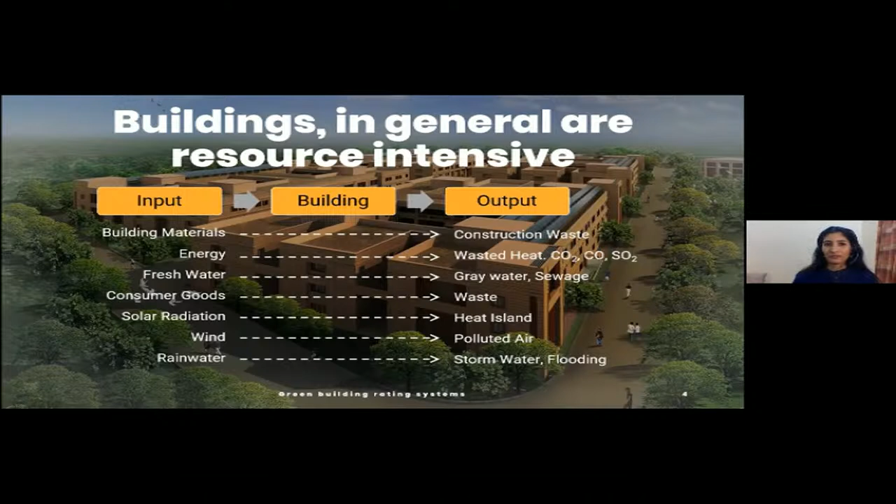I want to start with talking about buildings overall, right? This is all about buildings that we're going to talk about. In general, buildings are resource intensive, whether they are good buildings, bad buildings, great buildings, or whatever kind of building. There is lots of material that goes into building them. It takes energy to build buildings, it takes water during construction, and so on. And during the operational lifetime, there's a lot of output in terms of waste, solid waste and wastewater, air pollution, and so on. So this is the nature of construction and buildings in general.

Now, what green buildings aim to do is reduce the negative impact. So the impact is there—can we reduce the negative impact? That is the aim of green buildings. And yes, it's possible to do that.

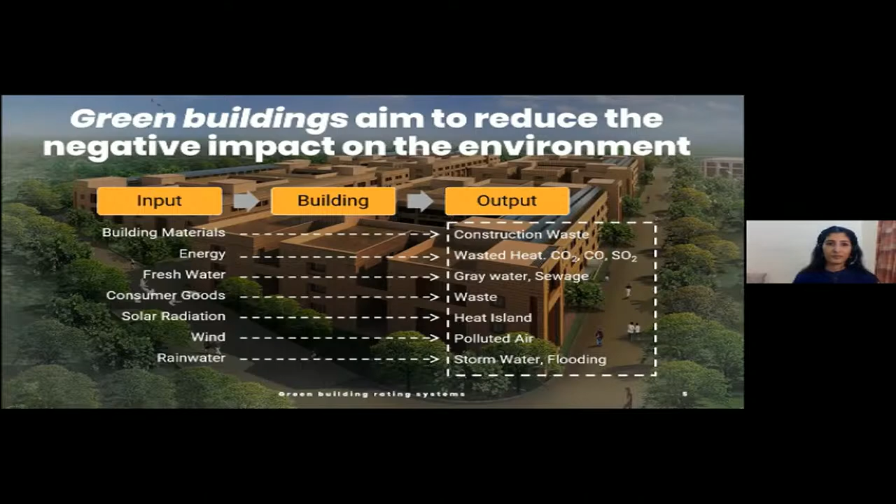Now, the concept of green buildings is not new, I'm sure you all know that. If we look at vernacular examples or old settlements from history, we know that we always knew how to build buildings that keep people safe and also comfortable, in terms of the indoor environment—whether it's temperature, humidity, and so on. Whether it's India or across the world, we see so many examples, which is a testament to the fact that we always knew how to design buildings, and by default, these buildings were green.

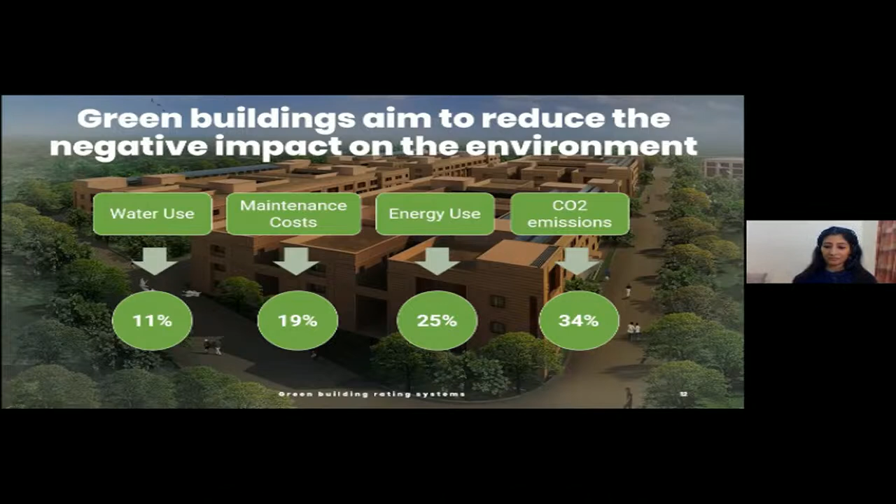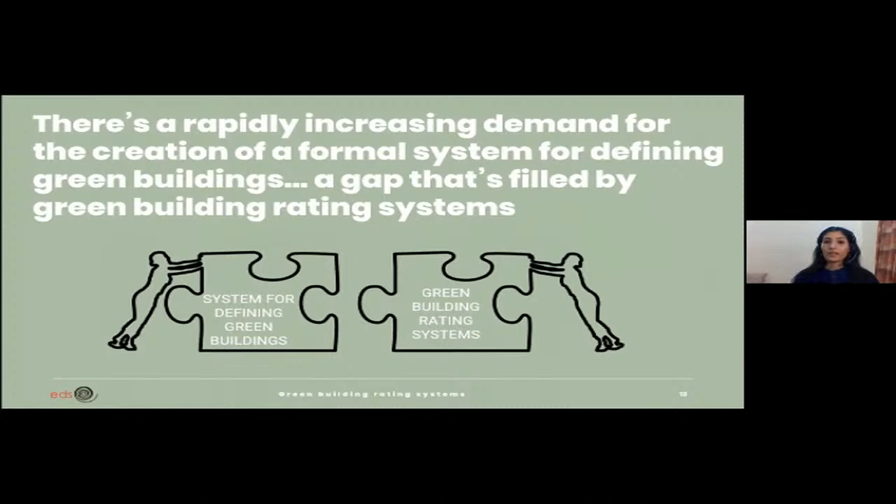But that's not true. And because it's not true, there's a lot of confusion around what is a green building. How does a green building really look? Can we define green buildings? What are the metrics that make a building green? So there is a rapidly increasing demand to create a formal system for defining green buildings. Is it a building that only uses stone and mud? Is it a building that has to look a certain way? Is it a building that has to have certain things in place? What is it?

That's what rating systems help achieve—a system or guideline to verify that a building is green. It's a set of criteria given to a builder, designer, or owner, which when followed helps verify that their building is green. It gives a definition of a common baseline of what is considered green. So if you compare different buildings across the same rating system, you can compare across the same baseline. There's some kind of commonality which green building rating systems provide.

Further, it's also an assessment tool because it's a rating—you're measuring against a certain baseline. As we move on, we'll understand the criteria in which green features are assessed. And finally, to recognize environmental stewardship. This is also very important, where clients or owners are recognized for their efforts to showcase environmental stewardship. It talks about their commitment to the environment, and their efforts are recognized, which is a very motivating aspect in taking that extra step towards making sure the building is really green.

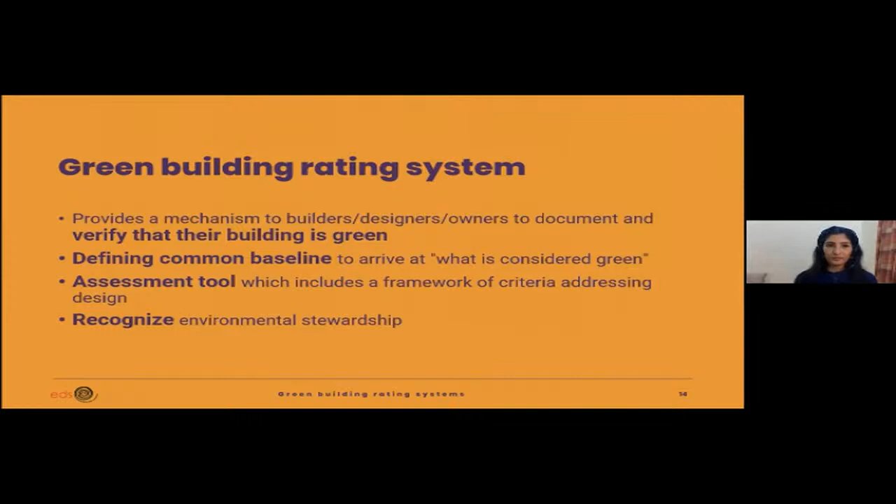Now, the goal of all rating systems is ultimately market transformation. This is really important—the majority of buildings are probably following typical building practices, and you can't call them sustainable or green. Whereas rating systems are pushing the market, so you move from business-as-usual typical practice to a green building market where there is demand for green building attributes. That's what rating systems have successfully managed to do over the years and are continuing to do.

An example is life safety. 100 years back, buildings probably didn't have life safety codes in place. But today, it's unthinkable to have a building which does not have fire suppression systems, for example—it's a given. Just like that, many green attributes become business as usual and a given. Over time, this market shift happens, and rating systems make sure this shift happens rapidly—they increase the pace of this shift.

By doing that, rating systems have helped make several industry best practices become mainstream. A good example of this is using materials with recycled content. A decade back, it was a bit of an effort to find such materials with recycled content and also have the supporting documentation. Today we've moved beyond it, and we're talking about embodied energy, EPDs and LCAs for materials. So it's probably mainstream now to use wood which has recycled content, for example. No one is really going to ask you about that anymore. So it's become mainstream.

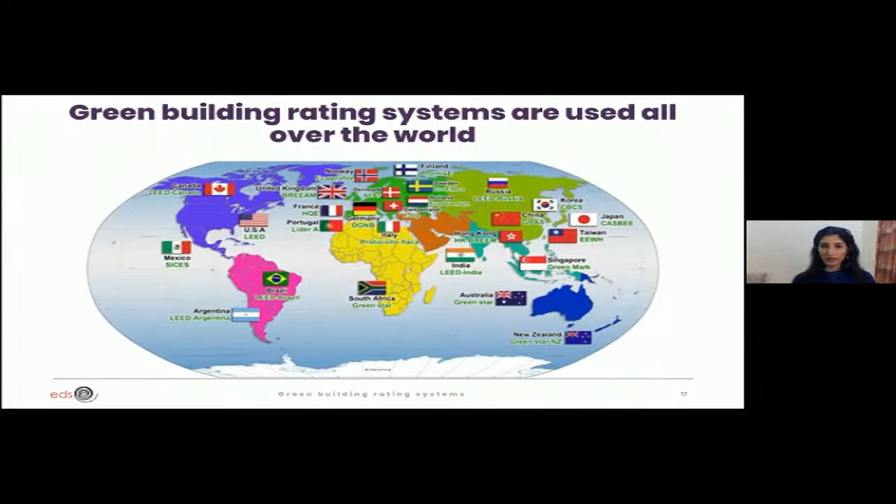Now let's talk a little bit about the movement in India, the green building movement. It started with the establishment of the Indian Green Building Council in 2001. Now we are in 2021, so it's been two decades since IGBC was established, and this marked the green building movement in India.

At that time, this flagship building was built - this is the CII Godrej Green Business Center in Hyderabad, India. This aerial view is the latest picture, so they've gone through a lot of retrofits. It's a 20-year-old building now; technologies have changed, and now this is a net zero building. At that time, this building was the greenest, platinum rated building in India, and it flagged off the green building movement, I can say. So if you wanted to look at a model contemporary green building at the time, this was the answer. It had all the green building best practices possible integrated into this project, so in that sense it's very iconic. That was the start of the green building movement.

Now at that time, USGBC and IGBC had a partnership, and so the rating systems were called LEED India New Construction and so on. Further, in 2014, IGBC became independent. And in 2007, shortly after IGBC was established, we also had the launch of the Griha rating system by TERI, that is the Energy and Resources Institute. So you had IGBC, which is the governing body for the IGBC suite of rating systems, and then it was LEED India. And Griha was this indigenous, made-in-India rating system, I can say.

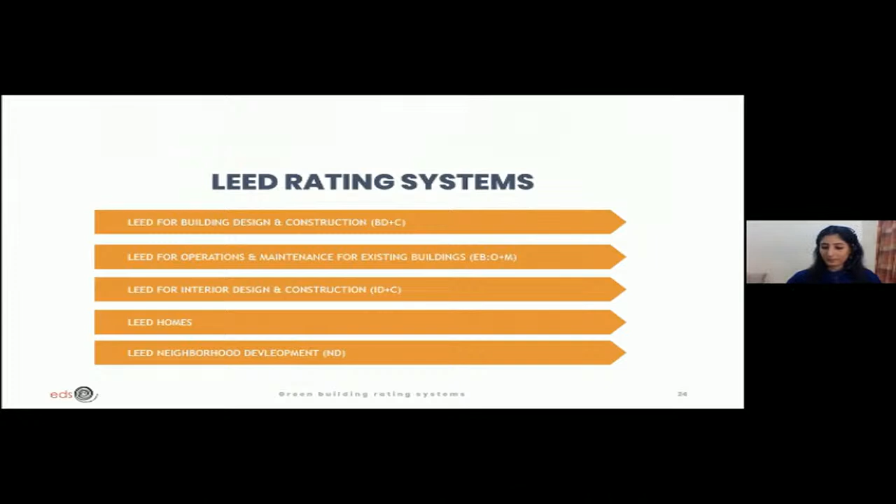Griha doesn't have such an exhaustive list, but depending on the size of the project, you have different rating systems. Griha itself is for all new buildings greater than 2,500 square meters. For smaller buildings, they have SVAGRIHA, and for large master plans, they have Griha LD, or large development, and then housing, and so on.

Since it's a rating system, there are certification levels. For LEED and IGBC, you have certified, silver, gold, and platinum - these are the four levels. For Griha, you have star rating. All three of these ratings are point-based systems. Over a score of 100, depending on the number of points you score, you can get either certified, gold, or platinum levels, and similarly for star rating, depending on the number of points scored for the project.

You also have professionals, green building professionals, like LEED professionals who help in... these professionals help projects achieve certification. They guide a project team in how to go about meeting the requirement in the specific rating system.

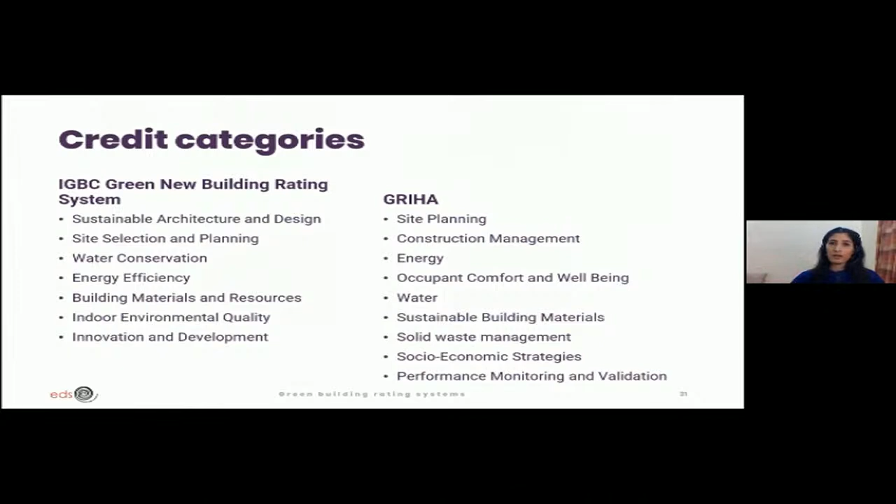On the other hand, GRIHA also looks at site planning, energy and water and materials, and indoor environment quality in terms of occupant comfort and well-being. So at a high level, they all address the same aspects of building design, construction, and occupancy. In LEED, it's called core concepts, and again, LEED addresses location, site, water, energy, material, and indoor environment quality.

So in a nutshell, rating systems address design, construction, and operations and maintenance of a building - it's the whole cycle. But there is a lot of emphasis on design, especially for a new building rating. Whether it's a new building of any kind, a home, an interior design and construction, or an entire new building, design has a big focus. This sets the direction for the rest of the 30, 40, 50 years of occupancy of the building, and it is the root cause of a lot of environmental issues.

A bad design will remain a bad design all its life, and no matter how much good technology you have in the building, it's only an add-on. Good technology is like a band-aid to a bad design. So you have to get the design really, really correct.

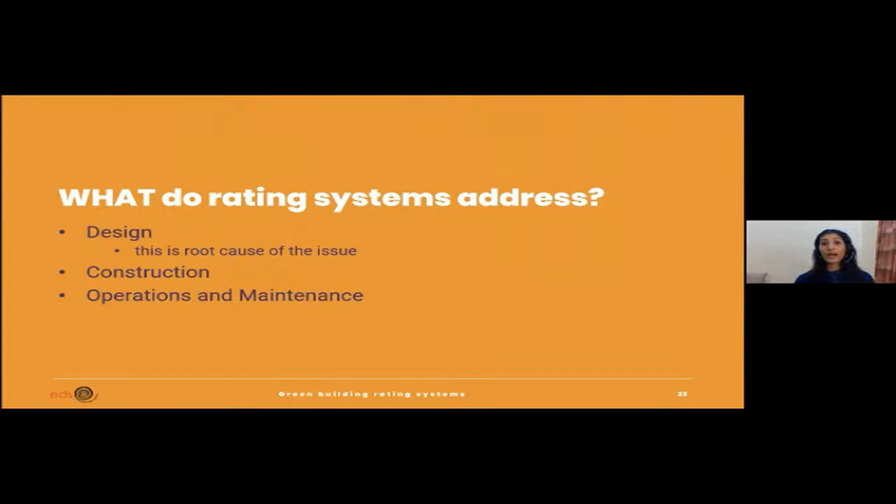A lot of emphasis of rating systems is on getting the design right, right from site selection to site planning, landscape, how the building is designed, the materials are selected, the way daylight is in the building, thermal comfort, and so on. Of course, there is some emphasis on the construction aspect, and then what happens to the building after it is occupied.

The measurement of the green, or the degree of green of a building, is both qualitative and quantitative. Not everything can be measured. You can measure water savings and energy savings, but something like daylight is more qualitative, although you can measure absolute daylight levels. Glare control is a more qualitative aspect, as an example. So rating systems do address both, with criteria that measure qualitative and quantitative metrics.

In a nutshell, green buildings provide long-term social, environmental, and financial benefits. That is the triple bottom line of sustainability. Green buildings, or anything to be sustainable, must address the three pillars: people, planet, and profit, or human health, economy, and the environment. As long as it addresses the three pillars of sustainability, it will have a positive impact on the environment and be truly sustainable.

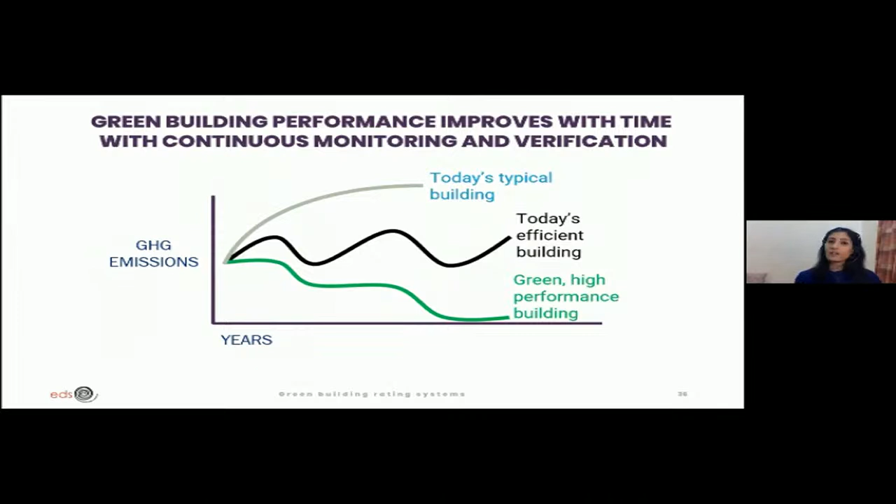Having said that, there are some limitations of rating systems as well. Starting with, it could be expensive. You may want to remember that all rating systems are voluntary, not mandatory. Projects that aspire to be certified have some aspiration, or maybe a requirement in place. So it's a voluntary decision taken by the project team, and there is an expense to it. You have to pay the registration and certification fee, so it comes at a cost. Sometimes it could be expensive, and there could be budgetary constraints.

It could also happen that a project team is only driven by scoring points, and the motivation to truly make the building green may or may not be there. Depending on which rating system it is, there can be a lack of regular and consistent updates. Sometimes it's so technical that you need specialized skills, calling for certain professionals on the team, which means an additional consultant on board, and the rating system calls for more additional paperwork. It is also perceived as complex and technical, which could be a deterrent to adopting or looking into a rating system.

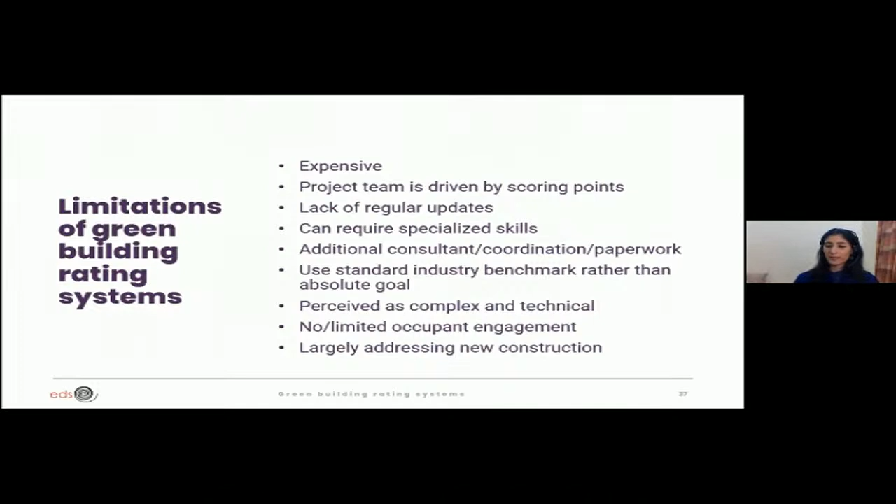They have gone through certain evolution over time. This is a tried and tested, continuously evolving mechanism that has been widely accepted in the industry. USGBC was established in 1993, LEED was launched in 1998, and just a few years later, in 2001, the Indian Green Building Council was formed. So around 10 years after the first rating system was launched, the Indian Green Building Council was launched. Around the same time, the CASBEE rating system in Japan was launched.

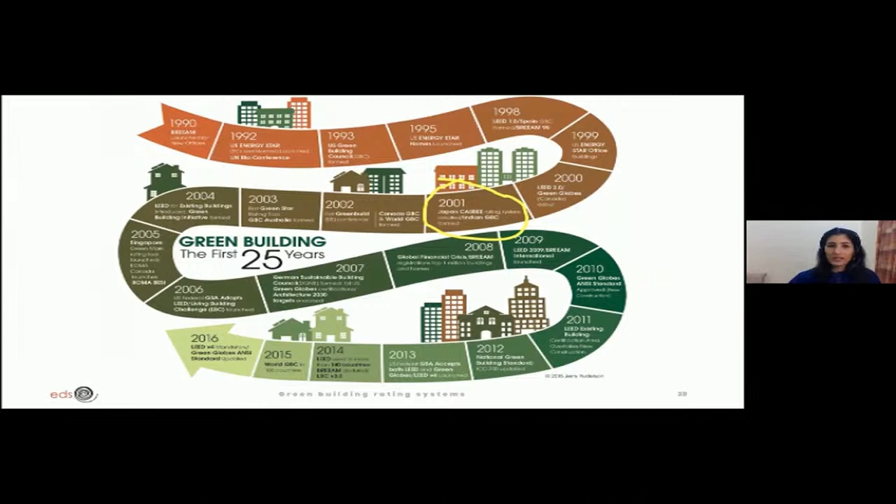Let's move on to 2010, when Green Globes was launched. And then if you move on to 2014, LEED is used in more than 140 countries. So clearly, as a movement, there is more acceptance of a rating system like LEED. And finally, in 2016, LEED version 4 became mandatory. So you started with version 1 in 1998, and then in 2016 it came out with version 4.

So in this whole evolution of three decades of rating systems having been there in the industry, the trend is moving from doing less bad, that's how it started, to doing more good. What it means is it's not enough anymore to say that my building is 30% better than an average building. That's not enough. It's been three decades, and we have to move beyond that. It's all about how the building is doing more good.

So an example of that is, rather than saying it is 30% more energy efficient than a baseline, it's about asking whether the building is energy positive, right? It's not much about diverting 50% of waste from landfill, but it's about saying, is this a zero waste facility? What can be done to achieve that? It's less about having a native landscape and more about restoring biodiversity. It's less about having just good light versus what is the impact on occupant health and wellness. What's the air quality in a building? What is the color rendering index of the light fixtures and so on.